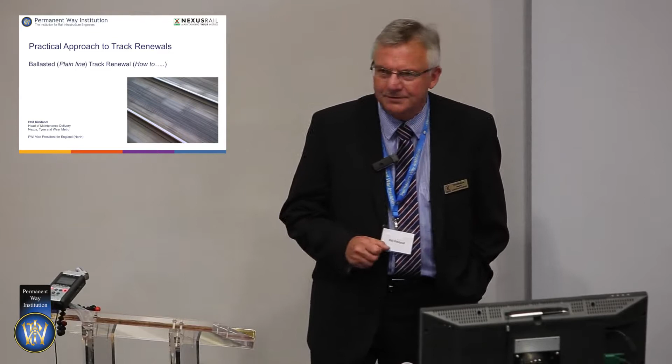If I seem a little bit nervous, it's because Nick has scared the life out of me by what I saw this morning. Salutary message for all of us to take back. Secondly, just remind me how many people have been out on the track in the last 3 months. Right, challenge. Next London seminar, see how close we can get to 100%.

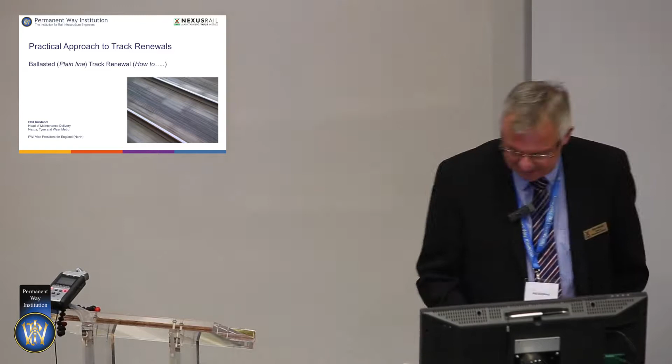Okay? Right, ballasted track renewal. How to, or perhaps how not to. Please don't try this at home. It's quite good because some of the themes, particularly what Thomas spoke about this morning, are replicated in my paper this afternoon, and you will see there's a common theme going through this seminar, and coincidentally nobody got their heads together beforehand, so it's quite good that it overlaps in that way.

Factors for consideration we've spoken about. I'm speaking here today as the maintenance engineer amongst renewal people, so what you are going to build is what I'm going to get back, and I ain't going to sign it back if it's not what I wanted in the first place. Okay? Known as Mr. Nasty up north. I'm sure you've all been there.

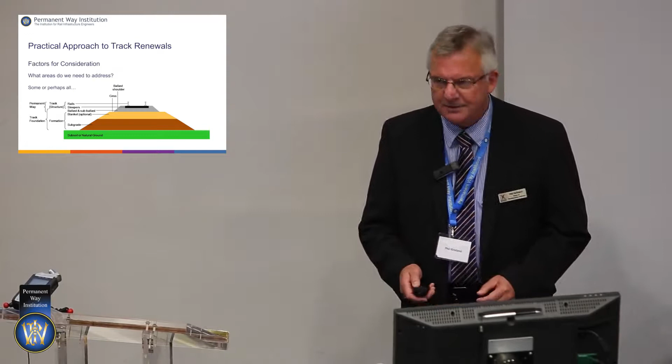Again, there are a number of areas to address when we're talking about ballasted track renewal. I can't do the whole subject justice this afternoon. I hope to give you a flavour of some of the areas that we're going to look at. And it's not just about sleepers and rails. What we're looking for, in summary, is a really good formation, preferably with a crossfall on it. Do remember that. A good blanket or geotextile, where we specified it, and a good depth of ballast.

When we say in that scope of work 300 millimetres of ballast, or 250 millimetres of ballast, that's what we mean. And remember, the maintenance engineer is going to go out there with a shovel and dig a hole under that sleeper personally, and if it's not that depth, he's not going to take it back. Okay? Again, we need to get the bottom ballast correct, because that's going to determine how long that track's going to last and what quality it is.

On Nexus, we specify 3D laser control on all dozers when cutting formations and preparing bottom ballast. And yes, I have a very similar spirit level in my office, which still gets used, nailed to a piece of wood. And we do use Tracktex in our blanketing works because that saves us some additional materials handling.

As you saw earlier this morning, detailed investigations will be required. The track tells its own story. It's not just poor top and alignment, something is not quite right under there. We need to look at integrity. We've heard about standards, and there are many, many standards. We need to look at compliance.

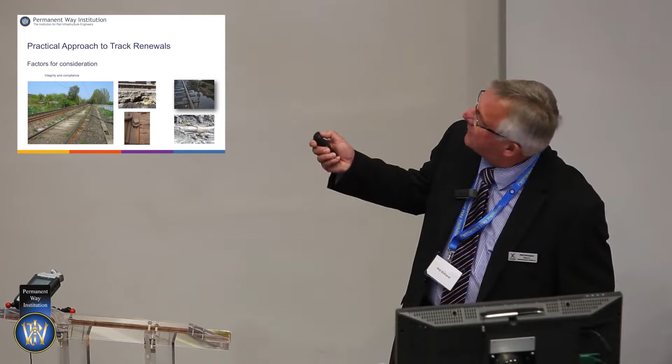We touched on this morning, how do we justify track renewal, capital versus maintenance? Well, we have a whole wealth of information that informs us. Sometimes, as you saw this morning, we think there's too much information there. But you can't beat looking at the stuff from the guys on the ground. Look at your asset intelligence systems. We use Maximo. Look at where your faults and call-outs are. Have a desktop review, but above all, get that foot on the ground and go and have a look. Right? You can't make it up in an office. Okay?

I go out to find out why my best eighth of a mile of track, my most maintained eighth of a mile of track, is next to the beach at Whitley Bay. And there's an awful lot of maintenance done in July. You can't beat going out.

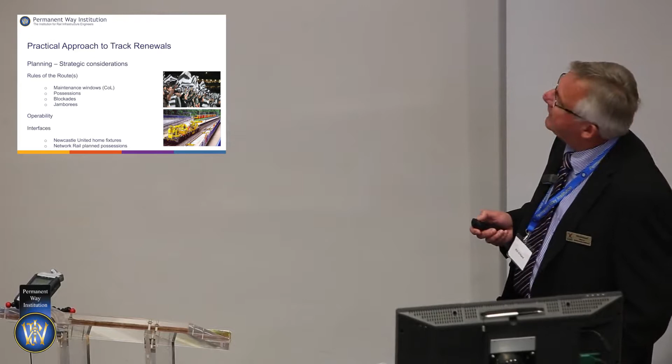But we have 52,000 people every Saturday afternoon, so we obviously don't want to shut the metro down. We run parallel to Network Rail. So obviously we work closely with Network Rail when they're doing their track renewals. We don't want to shut a parallel line and cut the customer off completely. So it's all stakeholder involvement.

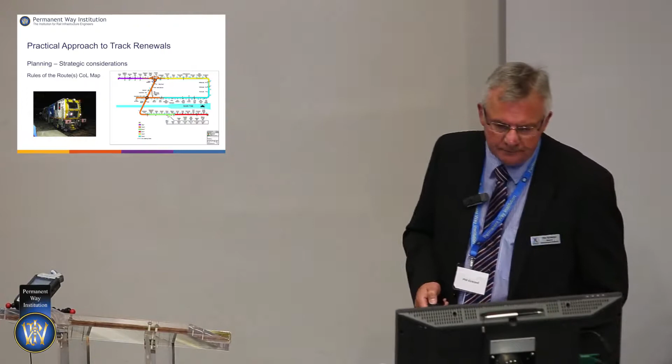We've brought in a new system. We've split the metro, which runs from the airport up here down to South Shields, and then from South Gosforth round the coast, past that wonderful eighth of a mile of track at Whitley Bay, and to the centre of the universe at St James's. We've split that into 6 sections, so we can actually take possession of these sections every night. The protection goes in the same place every night. The paperwork for the possession is the same every night, so people can't misinterpret.

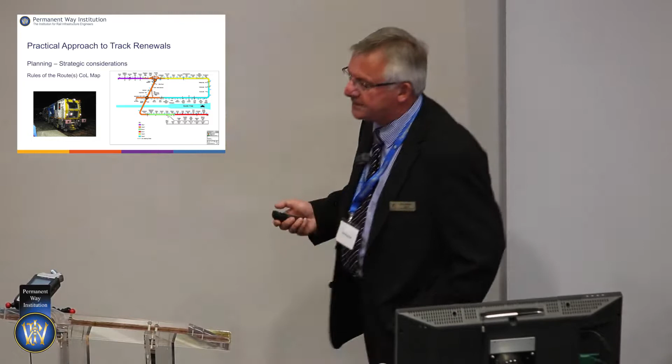We isolate between substations, so we actually go in and switch in the substation, so we don't send guys out down the track in the dark with a torch looking for a box to switch. So make it all simple. It's not difficult. Where we need to, let's say we're rail grinding or tamping over 2 zones, we just stitch the 2 zones together under one pick-up. For a jamboree, 27 days.

For us in the northeast, that's half our system shut down, so it's quite an intensive bus replacement service that we need. You just can't go and get huge fleets of buses on a phone call. So these all came from London. Our train operating company brought them in. The buses were geared for 45 mile an hour. They were so comfortable, and the drivers preferred the gearboxes on them, that they remained in the northeast, and they've got rid of the other fleet.

I don't want any bendy buses, thanks.

Specific considerations, we need to look at the site context, which we've heard about from London Underground this morning, equipment availability, methodology, access and logistics. So if you're shoving a track relaying train into Gore Canyon in Colorado, logistically it's a bit of a challenge. You are probably 300 or 400 miles away from somewhere, so you don't want to leave your rail pads or your Pandrol clips back at the depot. I was fortunate enough to be out with the train for a while, but safe systems of work, it's all there.

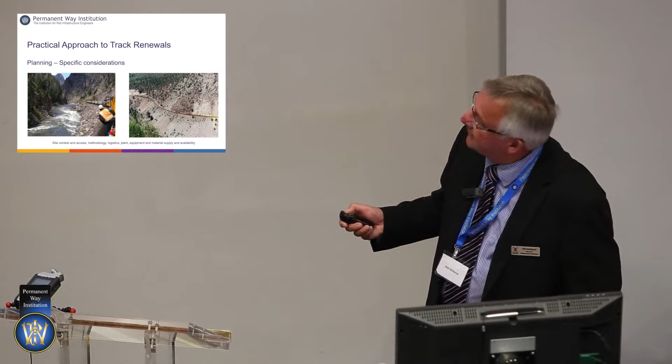Budget considerations, we touched on that this morning. Is it revenue? Is the maintenance engineer just going to make some minor improvements? Is he going to get some capital maintenance money, what we like to call the slush fund, where we get a chunk of money but we never actually say what it's for, but it's always gone at the end of the financial year anyway. Capital projects, which are standalone capital projects, and we currently have our ARP asset renewal plan, which is a £400 million injection into the system to rebuild it over 11 years. So, quite a range of funding streams there. But you want value for money.

We touched on design. Is it like for like? Are we going to do some upgrades? Should we future-proof it for enhancements down the line? Are we going to improve the geometry and speed improvements, clearances? And are we going to improve DDA and RVAR compliances? And above all, is it going to be maintainable in the future? Or is it going to require some really sophisticated kit to keep it going?

Interfaces, as I said, level crossings as one example. You've obviously got the highway and the railway interface, a range of profiles, but you generally also got a lot of utilities there. So you've got a whole range of utilities, so there's an awful lot of research to do at those locations before you actually put a shovel in the ground. Yes, the tilting train will hurtle through the platform at a great rate of knots, but will the stopping train achieve compliant clearances? So the designers have a lot of head scratching to do in those circumstances.

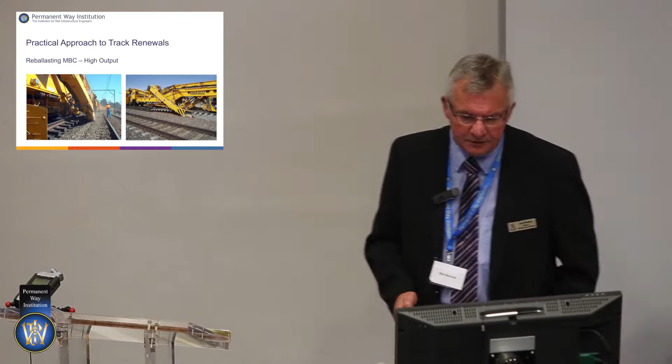If you do want to cut into the formation, then you need something like a formation rehabilitation train, which will actually take the whole lot out and start from bottom and build it back up. Not something that we've really got in this country currently, but someday I'm sure we will be going along that avenue.

Another innovation is reballasting by vacuum, relatively new to the UK, but used in Europe and used overseas. I would suggest it's probably got to prove itself yet, but it's good where you need to get in quick between trains and do short areas. It's used in the States on a regular basis, and of course it only takes 2 guys to operate it. So something for the future, probably.

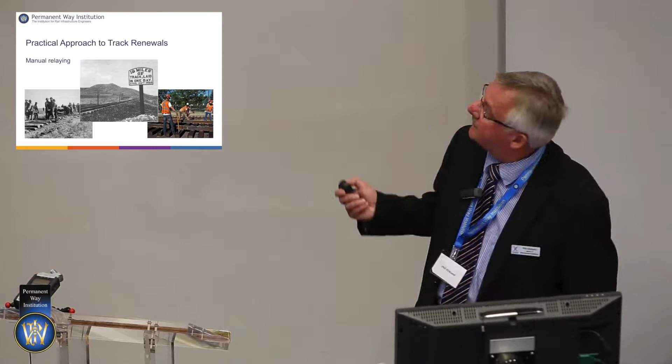If we go back to manual then, you can, of course, lay 10 miles of track by hand in a day. Don't think anybody's ever beaten that record, but it's still practiced. We still do manual track relaying.

But in the early days of British Rail, to speed it up, we developed craneage, twin-jib track layer cranes, and we reverted to what was known as panel relaying, which is, as it says, lifting out a whole panel. You can do it with a crane, or you can do it with a twin-jib. Many of us will have stood there as a sleeper has dropped off and whistled by your shoulder. Not the best place to be.

What problems do we have with panel relaying? Well, we're taking one panel out and we're putting another panel back. So whatever the memory was where the rail joints were, we've probably replicated that or not moved them on. There's additional work in changing panel rails to CWR. That causes extended speed restrictions and longer possessions, more possessions.

The twin jib, of course, needs two tracks for its possession. And there's an awful lot of work lining joints on curves. One day we used to be able to measure the outside rail and the inside rail and cut them exact and have them pre-curved and pre-measured and delivered to site. These days we send them as standard 60-foot panels, and somebody gets a disc saw out and cuts a lump of metal off the end. So we seem to have lost that art.

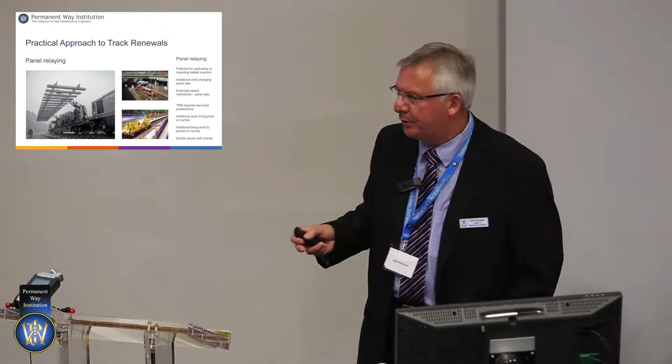The more you pre-curve the joint, the more you pre-curve the panel, the more chance of the load being out of gauge. That brings logistics problems into delivering it to site. And then if you don't pre-curve it, when you put it on the ground, you have an awful job lining the joints up. So your future alignment is going to be pretty poor.

There are other ways of doing it to keep it on a single line to allow the adjacent line to remain open. There are panel gantries of various configurations. Some run on the ground on Caterpillar tracks, other ones run on slave rails on the outside. That all takes extra work to set those up, so it's all additional work.

Or you can have an innovative solution like this, where you've got a tractor unit that holds the gantry forward. Problem is, you've just gone and spent an awful lot of time and effort making a perfect formation, and then you're now running a rubber-tired truck on it. So, you're causing yourself even more problems.

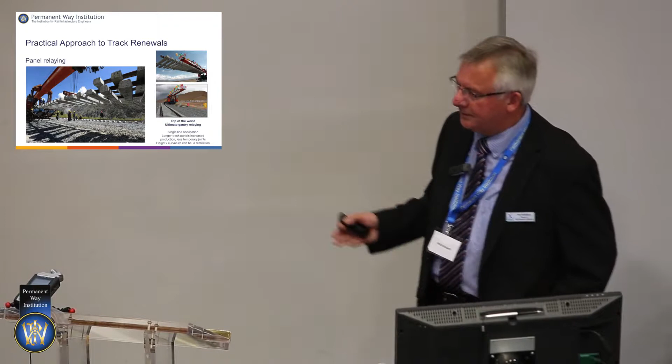The ultimate top-of-the-world gantry relaying in Tibet, end-over, flat-off type track laying machines, huge panels. They put them down in bite-sized chunks that reduce the number of joints. But again, when you come to a curve, you struggle to line that huge panel up. So that gives them problems. So quantity isn't always quality. There has to be a balance.

At Nexus, I much prefer loose sleeper relaying because we get the alignment and the level right first time. So the quality goes in straight away. Mechanical panel grab, one man on the machine, one man on the ground. That's all we need. And we just go off and roll it all out. So it makes it very easy.

How not to do it. This is actually in Australia. A rubber-tired crane to offload sleepers, so he's destroying the formation. There's a dump truck or something behind him, and if you look at the way the sleepers have been put in, they're going to have a devil's job getting the rail in there and lining all of that up. So they've just made themselves an awful lot of work.

Again, in New Zealand, and a site we're all familiar with, they've done all that work and all that effort, and they're now having to lift the sleepers with bars and tongs, and even the excavator spacing them to get them up and get the rail clipped up. So where you've gained an hour or 90 minutes on your program, you've now just lost 2.5 hours in clipping it up.

And if you use rubber-tired vehicles, then you'll end up with a track looking like that. When it looks like that, that's extra work for your tamper, that's extra time on your tamping shift, extra strain on the tamping machine. You're probably going to blow a hose or something with the pressures you're using on that.

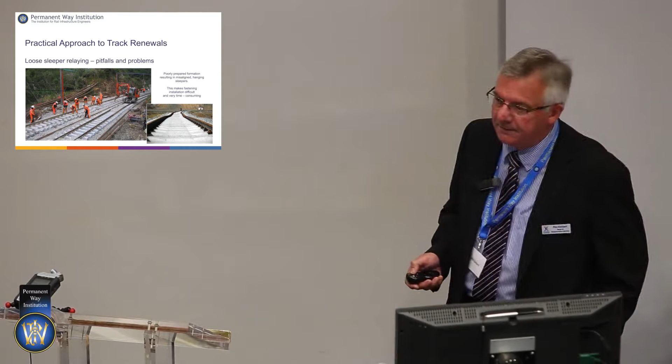Slinger train and steel sleeper relaying, it's even more critical that you get these lined up correctly in the first place, because once you've dumped the ballast on top of them, as you all know, they won't move an inch. They're not designed to move. So you're only going to break your tamper.

Your long welded rail train is probably the heaviest train on the system. Right, so get its route and its path correct. Make sure the bridges it's going to go over have been assessed and checked. It's no good getting halfway down the line on a Saturday night and finding out you can't get to your site.

Please avoid the pull apart. It's a bit of a mess to sort out. You don't want one of them on your patch. You can't couple anything to it, and some poor guy's got to burn all the ends off them. So you've got yourself another 24 hours work already. So don't overload the long welded rail train.

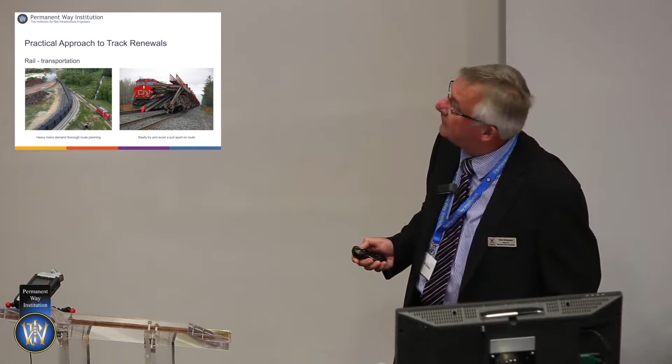Don't try this at home, but unloading long welded rails with excavators is a no-no. Right? Don't tie the excavator to the back. All that happens is that the rail rolls over on its side. So you've then got to spend the whole shift standing the rail up on its rail foot. You should, of course, use the properly designed kit.

Thimble and rail, you're all probably experts at thimble and rail. And as you know, the greatest tip in the world is you've spent all night preparing that ballast bed, you've laid all those sleepers evenly spaced, and then somebody comes along with a road railer and knocks them all over the place. What you need to do is put one rail in the four foot, put some dead weight on those sleepers so they don't get knocked about, put one rail in, and then put the rail in the four foot on the other side. Save yourself an awful lot of time and effort.

And the guys won't scream at you either. Let's mechanise the process. In another life, I was a dinky skinner on a track relaying train, but what a fantastic job that would have been. Have that on your armband, dinky skinner, right?

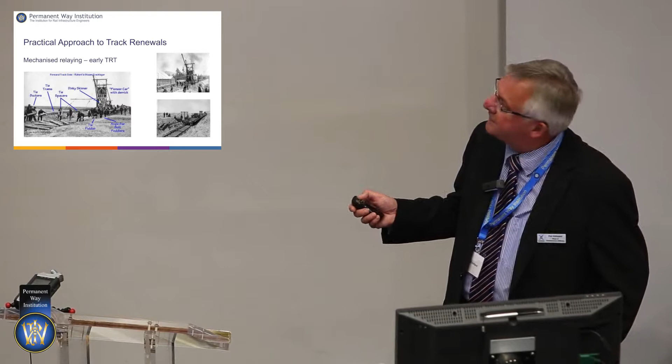But manual sleeper relaying in these conditions was very onerous, so the guys quickly decided to mechanise it. And the philosophy hasn't changed much over the years. The same process where we drop the tracks in front of the machine on virgin ground, and then we just feed all the materials through and pull the rails out in front. That gives us a carpeted railway ready for ballast and tamping. Slight variation. We can pull the same train with a bulldozer, or it can self-propel, but the technology and the philosophy is the same. So different ways of doing different kinds of renewals for different sites and different contexts.

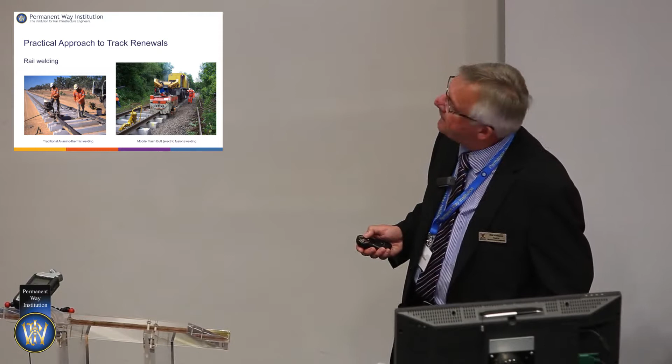What does that mean? It means the quality's improved, the quality's higher. It means these guys, the welders, they don't have as much effort wedging the rail up and lining and leveling the rails, so that's a big time saving, a big cost saving. It means they're not whinging at you, and it means you get good quality welds at the end of the day. It also means if you're using the flashbutt technology, that the machine has less strain and less effort picking those rails up. So again, attention to detail and quality.

Then we move on to the big boys, the track relaying train. As many of you know, it beats as it sweeps as it cleans. It picks up the old track and renews it with new track. A mobile logistics platform. If one element goes, the whole lot goes down. So you need to be on top of your game with it. But the quality is unbelievable behind it.

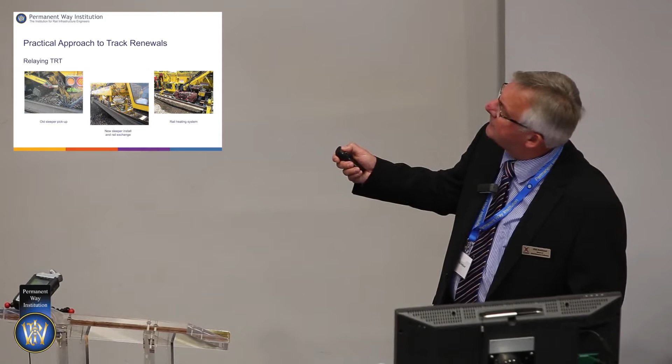So there we have the old tie pickup, picking up the old sleepers beneath the machine, the new sleeper installer, feeding them down the conveyor and swapping the rails over, and the rail warmers heating the rail up to its stress-free temperature before it's clipped down. All in one go. I had the privilege to work out in Colorado with the machine before we brought it onto the West Coast main line. Now, if you look at this picture, that's the quality immediately behind the track relaying train. All the guys are doing is picking up muck and bullets and a whole load of rubbish.

Then you need a ballast train. Usually some underpowered, clapped out old loco from the back of the shed that couldn't pull the skin off a rice pudding.

Where's Mr. Brunel? Yeah. Yeah. And we got the same from George Stephenson, so don't worry.

Somebody mentioned side tipping wagons earlier on. I had many a happy shift cranking the mermaid wagons up. The philosophy hasn't changed much, but the systems are far, far better. And when we talk about safety, I remember the York office developed a pneumatic impact wrench that would rotate this handle. And it came out to Northallerton one Saturday night, and a guy put it on the side of the wagon. And it flung him 360 degrees and killed him instantly. Yeah. So that was the end of the mermaid wagons on the eastern region.

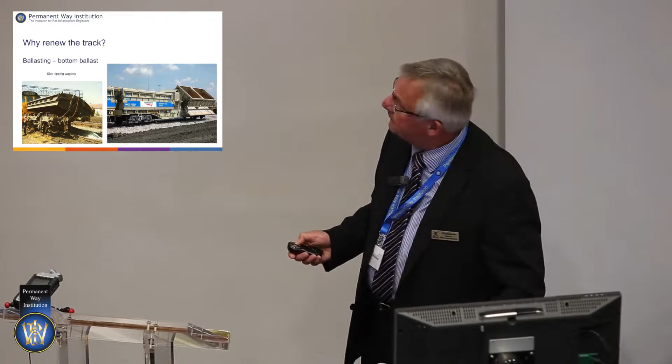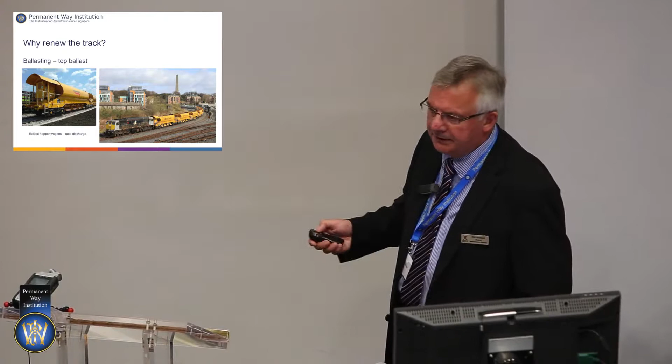Standard method is ballast hoppers, right? Probably one of the most dangerous activities you can get involved in because it's a moving activity. People, by their very nature, will jump on and off these moving vehicles. The ground conditions are pretty uneven. You need to avoid it at all costs if you can. Thankfully, we've moved on to an age of self-discharge auto ballaster wagons, which take that human interface away from being on the ground.

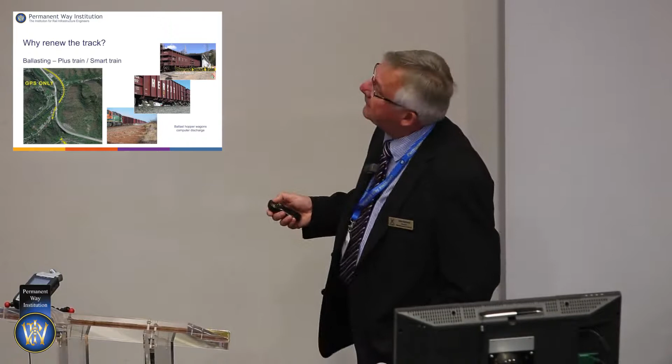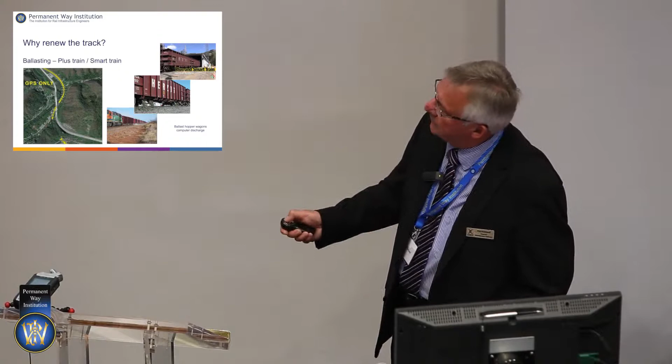But the future is the plus train and the smart train, where we do a computer survey of the whole route. We put that into a laptop, we sit on the locomotive, we plug it into these wagons, and we run through the route at 40 miles an hour, and we discharge the whole train, and it shuts itself off when it comes to an obstacle like a level crossing or a bridge, and then restarts at the other side. No human interface on the ground or on the wagons at all. Two guys on the locomotive, one technician, one driver. Smart technology is an inertial system which allows it to do the same through a tunnel where it would lose the GPS signal.

High output kit, as you know, tends to come with its own custom-built materials handling systems, pretty self-contained, but able to move high volumes of materials very quickly. How do we spread it?

Well, we used to spread it with a plough, and the blade wound down very easily, but it didn't used to wind back up very easily. It used to cause all sorts of problems. And I remember many a happy shift, 609 gang propelling me through Newcastle Central Station, shouting to the people on the platform, left hand down a bit as they turned the wheels. We used to have great fun on those days. Conversely, I've seen a number of PWA staff flung out the back as the train set off back for home. So, you know, not the best thing to do.

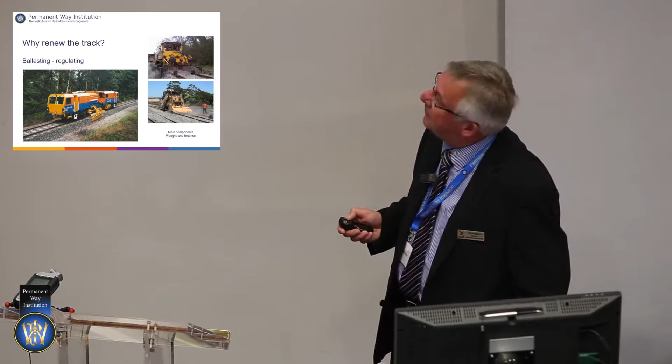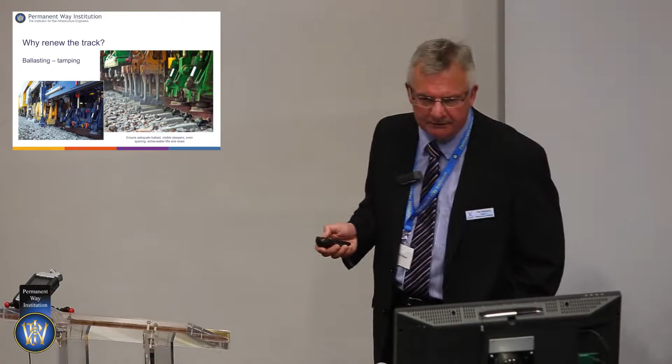The same with your tamper. You can have too much stone, which will just clog up his gear, and he'll come to a stand, and he'll be hitting all those new concrete sleepers that you've put in, chipping away at them, causing damage. Too little, you'll punch his tools right down to the bottom, pull the limit switches out of the tamping banks and grind to a halt. So your £3 million machine's now stuck there in the middle of your track renewal site. So the quantity of ballast is pretty important.

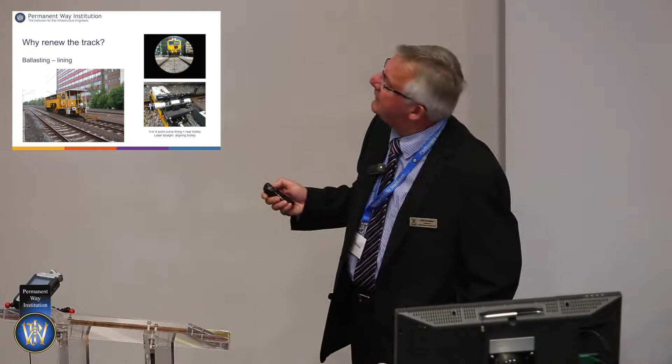Alignment, we control with a range of systems. Our older tamper at Nexus had this scaffold trolley on the back to get us up to 4-point lining, which is more accurate. We do have a laser lining system for straight track. Most modern machines have a track geometry control system, a computer-based system, that makes the job a whole lot easier. But however sophisticated these machines are, and however expensive they are, if you haven't got the ballast right, it won't deal with it. So that's what we've got to look at.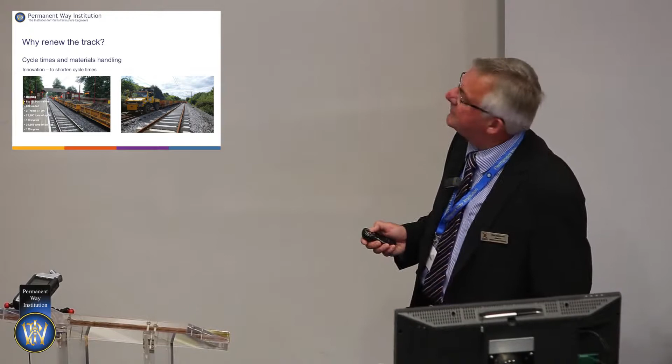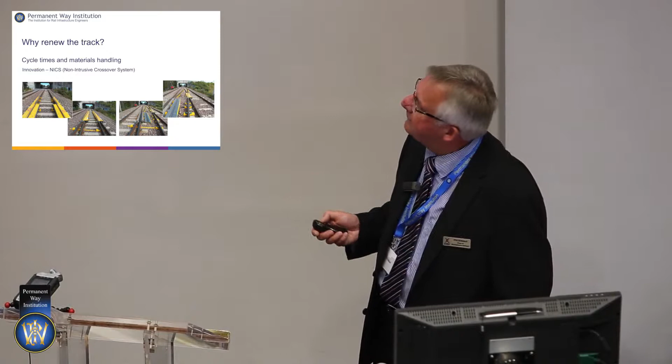However, we overcome that by a little bit of innovation using NICS, the non-intrusive fold-away crossover system. That immediately improved our cycle times by 50%, which is a massive saving on a 27-day blockade. And we've used that to great effect. You simply fold the flaps over, it becomes a crossover, you fold it back the other way, clip it out of use, and you can run your normal trains during the day. Fantastic innovation that we've used.

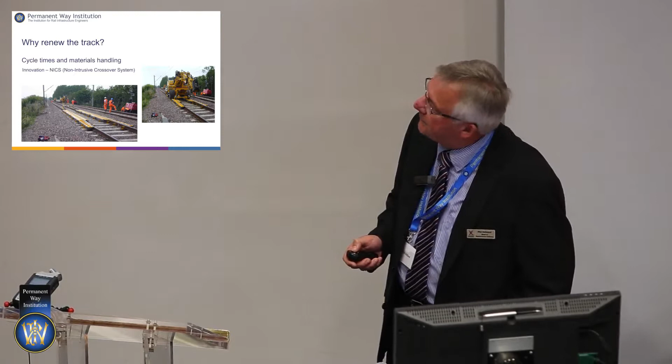We have a philosophy, right first time, right every time. Otherwise I won't accept it. I know I might sound awkward, I might sound blunt, but it's not in anybody's interest to accept a substandard product. You wouldn't accept it from a telephone company, you wouldn't accept it from Sky TV, so why accept it on a track renewal site?